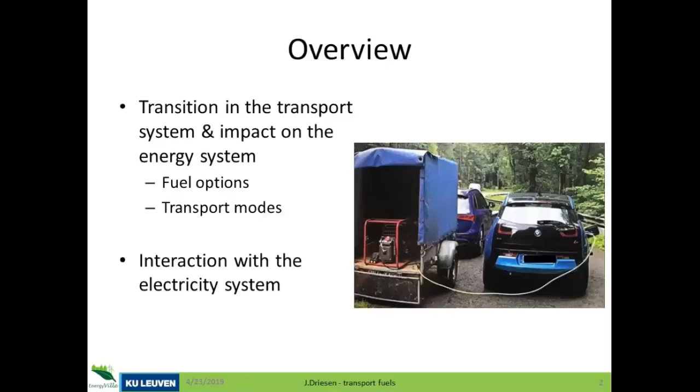Now, as you all know, there's an energy transition happening in a lot of countries around the globe. And you always see these typical pictures of the new energy system, mainly an electrically driven energy system with solar modules, wind turbines, offshore wind turbines even, some classical power plants used in a different way. But also, always you see more and more vehicles appearing on pictures like this. So clearly it's understood that there must be an interaction between these new types of cars and the energy system.

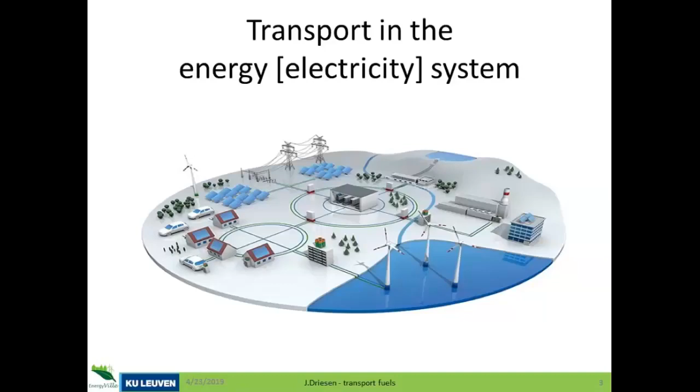What kind of interaction will we have? Will we go to electric cars, hydrogen cars, or will we make synthetic fuels? Well, it will probably be a mix of all those in different types of transportation, which I will try to explain to you in this hour.

Let's start with the first type of clean fuel ever considered, because we want to get away from fossil fuels due to CO2 emissions linked to carbon content, and maybe replace them with biofuels, which are chemically identical but based on plants, so a short carbon cycle. That idea kept flying for a long time, but there are problems, because we need to grow a lot of plants to convert into biofuel products, and it's clear this may interact with the food supply system and the food chain, causing land competition.

Of course, we can grow newer types of biofuels that interact less with the food chain, but there will still be competition for land. Also, in recent years it became clear that growing big amounts of plants for biofuels causes interactions with CO2 produced by fertilizers. So in the end, it's officially renewable, but biofuel is going more into the background and isn't really a widely interesting option anymore.

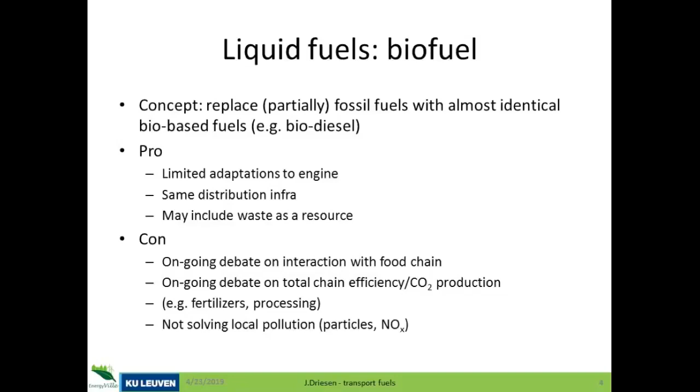And by the way, if you switch to biodiesel, you don't solve the health-related problems like particles and NOx emissions. So the next candidate was natural gas.

Of course, this is a fossil fuel. We start from methane, change the engines a little bit, and get very clean burning with almost no particles and almost no NOx if tuned well. In a lot of countries this is very popular for heavy traffic like public buses - you see these a lot in Europe and some American cities.

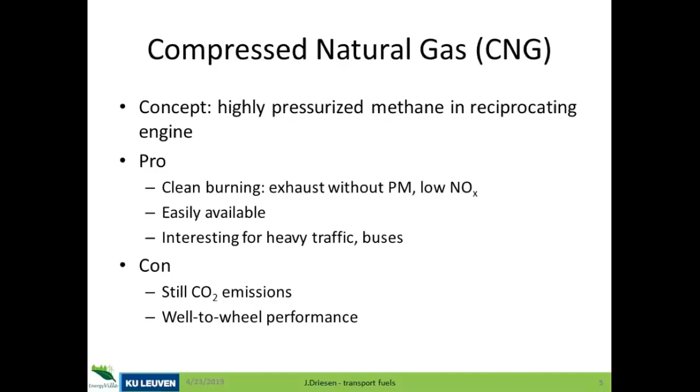But you may wonder, is this the best way to use natural gas? Surprisingly, these days, when we can also consider electrical vehicles as a realistic option, you may consider using that natural gas to make electricity instead. Then it becomes interesting to check the whole chain, well-to-wheel as we call it, in case of transportation, and we can compare, for instance, the top line that you see.

There we use natural gas, compress it to the right pressure level, put it into the car, and drive with relatively low efficiencies. But these are normal efficiencies for combustion engines, for reciprocating engines. So in the end, you have a well-to-wheel efficiency between 10-20%.

Now, these days, we can also convert natural gas to electricity using combined cycle power plants. There's of course a little bit of transmission and distribution losses along the way, and we can put that electricity into an electric vehicle with highly efficient charging - this is power electronics, efficiencies always in the 90s. And when you drive, this is also extremely efficient because there's no thermodynamics involved - this is pure electromagnetics, so efficiencies of drive systems can be very high.

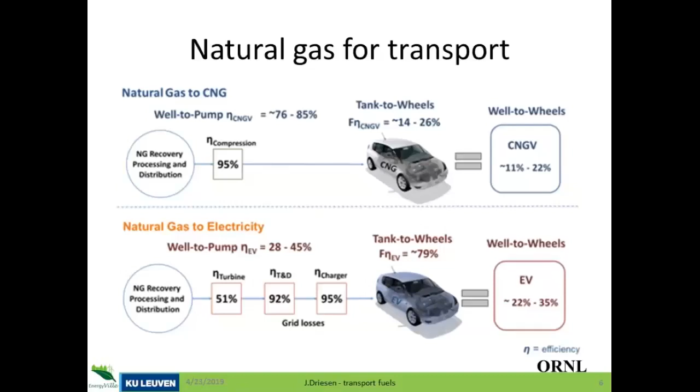So in the end, if you used your natural gas to power an electric vehicle, you'd have double the well-to-wheel efficiency compared to natural gas vehicles. So you see, even if you still consider using some fossil fuels as a transition, moving as quickly as possible to electric vehicles is a very interesting option anyway.

But where's the hydrogen? Because for a long time, talking about clean cars meant talking about hydrogen vehicles. Now, a hydrogen vehicle, honestly, is an electrical vehicle - you just make electricity on board using a fuel cell based upon hydrogen that you put in a tank in the vehicle. So in fact, this is what we call an electric series hybrid car. And the exhaust is of course clean, because if you burn hydrogen, you get water as an exhaust.

Now, the hydrogen itself is not easy to make, although in some chemical processes it may be a cheap byproduct - but watch out, these chemical processes may also produce a lot of CO2 emissions directly or indirectly. So you have to come up with clean hydrogen based upon renewables - you need clean electricity to make green hydrogen to put in cars. That means you need electricity somewhere along the way to make hydrogen as an intermediate fuel to drive your car in the end, which is also an electric car.

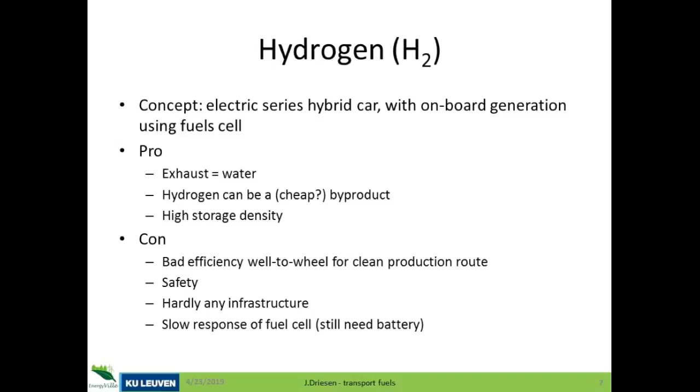You may also want to consider well-to-wheel efficiency. If you use electricity anyhow, we can put it directly into lithium batteries in a car and start driving with very high efficiency. Alternatively, we can use that electricity to drive an electrolysis process, with compression along the distribution chain causing more losses, and in the end convert it back into electricity in a fuel cell. Fuel cells have a big range of efficiencies, but you will never reach the high efficiencies of direct electricity conversion. Several well-to-wheel studies show that with the same electricity, you can drive 3 to 4 times further with a battery car than with a hydrogen car.

Of course, we should not throw hydrogen off the table immediately, because its big advantage is that it can be put in a tank under high pressure, so you can take a lot of hydrogen or another gaseous fuel along with you. So if hydrogen still has a future, it's probably in long-range transportation where you have to cover large distances, or as a kind of storage for energy that you want to put aside for a very long time.

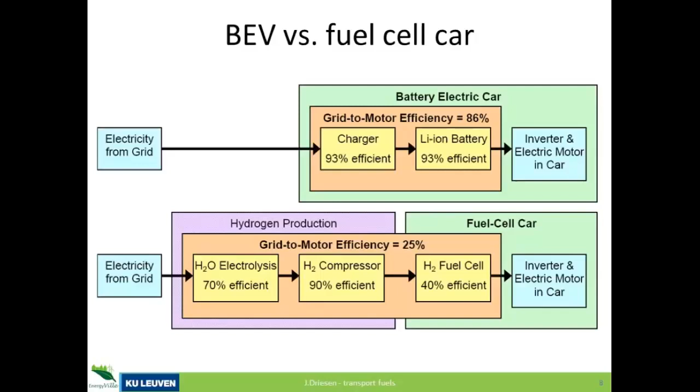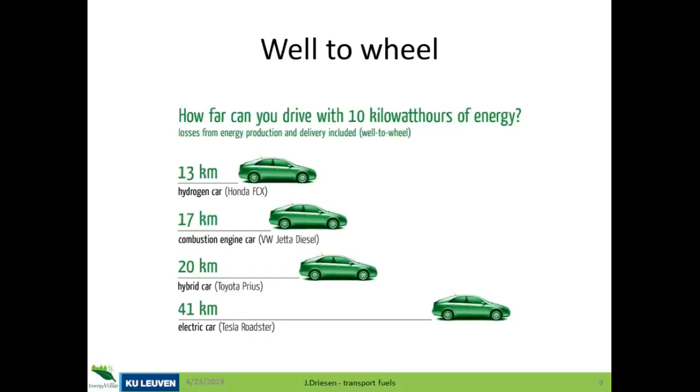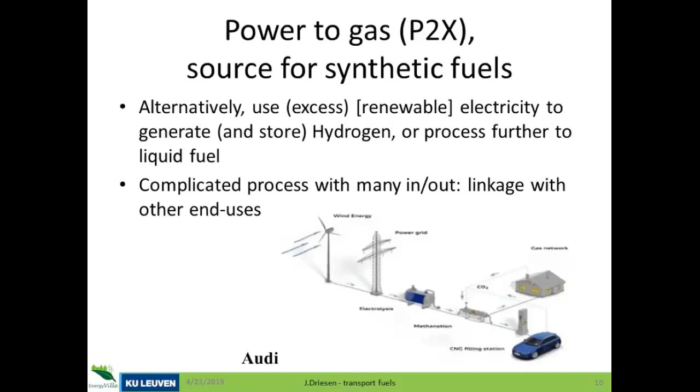But how are we going to use hydrogen if we still use it for long-range transportation? Then we have to consider power-to-gas processes, making synthetic fuels. With synthetic fuels, we try to use excess renewable electricity to generate and store hydrogen, or process it further into other gaseous or liquid fuels. But for that, you need a lot of chemistry, illustrated in the next picture.

If we start from electricity, we use electrolysis to generate hydrogen. You can combine this with CO2, which you can capture from the air if you want - this is like a negative emission. You can combine that in a methanation process, and you're left with clean natural gas. You can store that, or put it into a natural gas system as a kind of clean synthetic fuel.

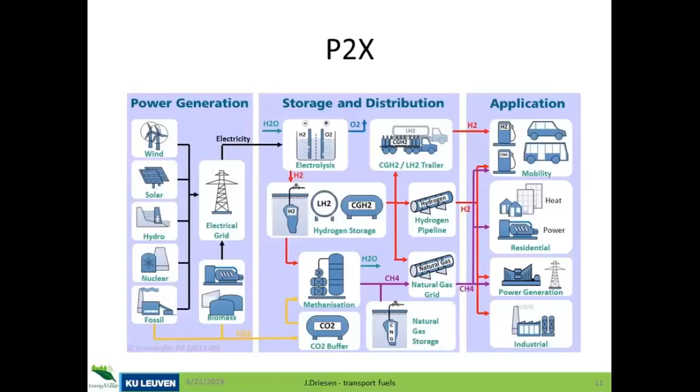For a long time, some car companies thought this would be the ultimate clean vehicle solution, because they didn't believe in what was possible with batteries. Companies like Audi invested heavily in power-to-gas research, but in the end it seems more interesting to use this technique for long-term energy storage, or to use these synthetic gaseous fuels for long-range transportation - maybe ships or big trucks. This is another option we will definitely need to consider; we should not throw away the natural gas system right away, as it will probably be used for a long time with this technology to come.

Do we always need the electrical route? There are alternatives - you can also make a synthetic fuel directly from sunlight, but this is low TRL technology, possible in the research lab. You need alternative types of solar cells, not the ones producing electricity, but ones with built-in catalysts. They will, for instance, take water from the air, a little moisture, and turn this into hydrogen while releasing oxygen. This has been proven mainly on lab scale, and the efficiencies are still really low, but never say never.

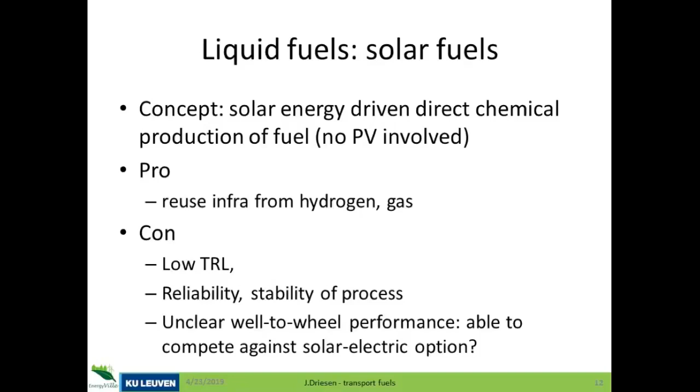Maybe one day we will combine renewables making electricity with renewables making fuels. But for the moment, and definitely for the coming years, maybe decades, the solar-electric option to make these kinds of fuels will definitely be the most profitable. So, these are solar fuels. To quickly conclude: electricity-based transportation is probably the best - it has good performance, enormous traction, very good well-to-wheel performance, and low noise, although some people consider that too a problem, that it is too silent.

We know how to produce these vehicles cheaply. I have to mention a study published last week. For a long time we said it would take years before electric cars would be as cheap as combustion vehicles. Well, last week Bloomberg brought out a study showing we might reach the break-even point by 2023 already, mainly because of mass production and crashing battery cell prices, which were always the most expensive components. This is a very important date, 2023, because it means we are one leasing cycle away from having cheaper electric cars compared to combustion cars, if these studies are right.

Of course, there are some points to discuss. I'll talk about the charging problem in a moment. For a long time the cars were a bit heavier, although with lithium batteries we've shrunk them by a decent factor. Some predict we can shrink them further by a factor of 4, so we can put much more energy into the car, and range anxiety problems will disappear. The only problem that remains is whether we'll have enough charging points in the right place, but I'll discuss that in a moment.

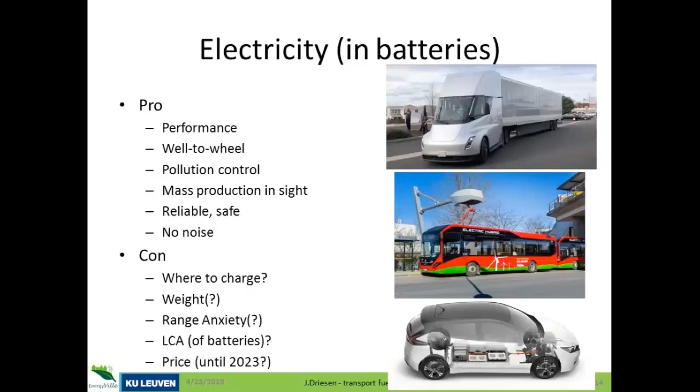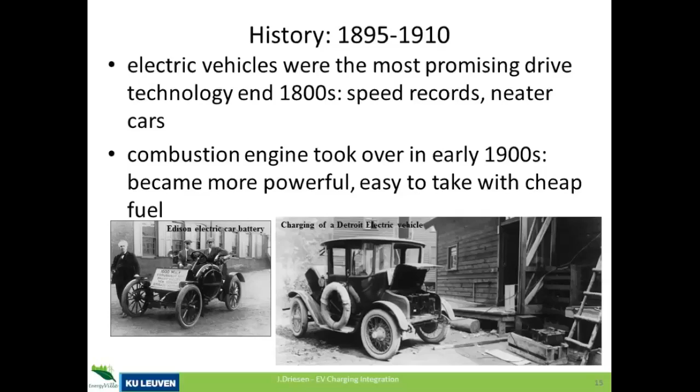So actually it looks pretty good for electric vehicles. But on the side, something some of you may not be aware of: electric vehicles are older than combustion vehicles. At the end of the 19th century, these were the promising vehicles—very easy to drive, easy to start, clean. They were considered cleaner than the common form of transportation then, which was horses, and I leave it up to your imagination what they mean by cleaner exhaust. But even then, they had to think about charging and where to put charging stations in the then-developing electrical grid. So after a century, we are still fighting the same problems.

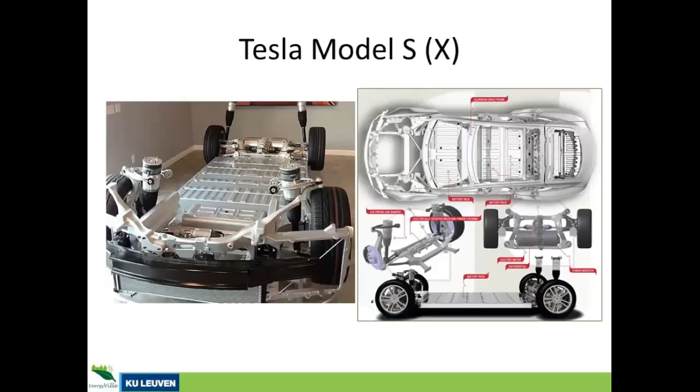Honestly, I also have some mechanical engineers following my courses, and they don't like this. But this shows there's potential to make electrical cars cheaper in the end if we can bring down battery prices, and that seems to be happening in practice.

A cheaper type of electrical car, which is very popular, is for instance the Nissan Leaf, and there we see a similar design with batteries in a kind of skateboard structure under the floor. But why do I show this Nissan Leaf? Well, the Nissan Leaf was the first car that had a fast charging plug.

If you look at the picture on the bottom right, you see there's a bigger plug there. That's a DC plug, a CHAdeMO plug, which allows charging at more than 50 kilowatts—a relatively high rate, which would allow you to recharge your car in probably less than an hour. Of course, we still have to compare this to being at a fueling station for just a few minutes, so we're not there yet, but this is just a start.

The new standards now being rolled out with new charging stations being deployed go up to several hundreds of kilowatts. And honestly, you have to ask yourself, do you really need these fast charging stations all the time? Because in the end, a car is just a fancy object that you buy to be parked most of the time, so honestly there's lots of time to recharge slowly as well.

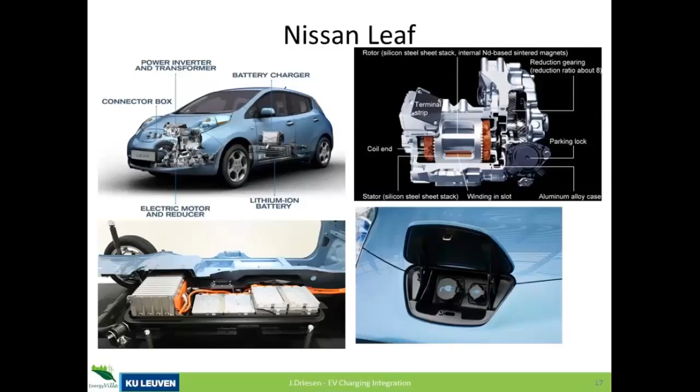But I'll come back to that in a moment. Now, if you look at the current market in Europe and the US, there's also a lot of plug-in hybrid electrical vehicles on the market.

These are considered now as a transition technology towards full electric driving. These are vehicles that can drive a bit further if the battery is depleted, so they can use standard fuel then. But this leads to quite heavy vehicles, which are not that cheap. So it's expected that probably a decade from now, most of them will disappear again from the market. But in the meantime, it helps us get used to plugging in the charging cable.

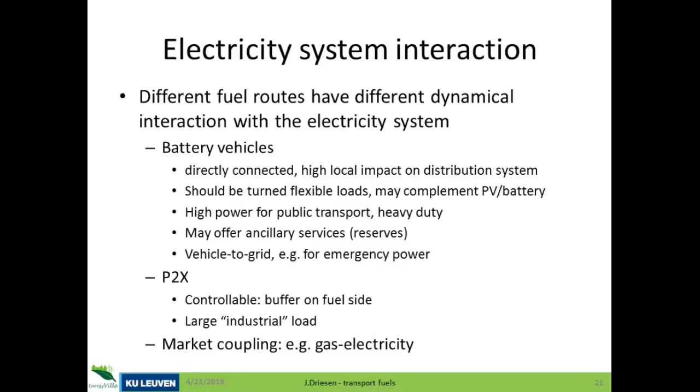But a big question is still, where are we going to charge? A lot of people have a driveway or a garage, and that could be the home base where you install a relatively low power charger, and overnight your vehicle can charge. But of course, at night there is no sunshine in case you have photovoltaic panels. So we have a perfect mismatch there.

But a lot of vehicles, especially company vehicles and professional vehicles, will be charged in the parkings of offices throughout the day. And then there's still the question: what if you go to pay a visit to a city or another place, or go to big shopping malls or points of interest? You also have to think of offering charging there. And there could be some interesting business cases behind it.

For instance, some big shopping chains, think of IKEA, in some countries offer free electricity if you come shopping with them. So you see here, we have to think of the business models too.

How will this affect the local electricity system? This is not a minor change. You can easily prove that if you add an electric vehicle to a family home, the electricity consumption on an annual basis more or less doubles in most countries. So there is a very big impact, but on a very local scale.

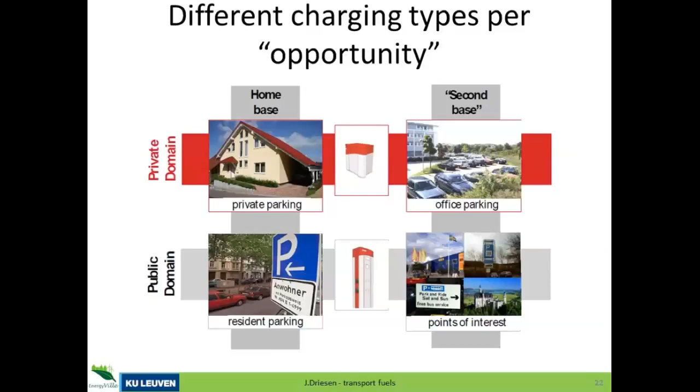And the risk is that if you do uncoordinated charging - we drivers are all social animals, we all go to work at the same time, come home at the same time, and we plug in at the same time - you end up with big peaks in the evening, coinciding with other consumption peaks from HVAC, cooking, lighting, etc.

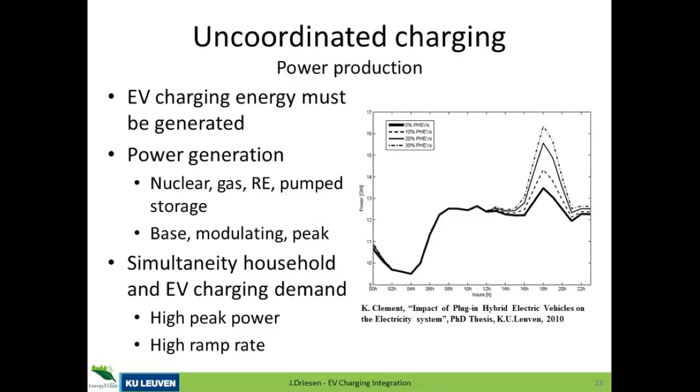So we end up with a very big consumption peak in the evening that may stress the local distribution feeder a lot. We've made some studies for Belgium and other European countries, and we came to the conclusion that roughly if 1 in 3 vehicles would be electric, that's the limit you can handle. If more than 1 in 3 vehicles turn electric with uncoordinated charging, you tend to overload the transformers and mess up the voltage profiles too much. That's on the distribution level.

Now, what about the power plants? Sometimes you read articles saying, yeah, if we all drive electric, we need to build nuclear, or we need to build coal, and then we're saving no CO2 emissions. Honestly, if you study this carefully with good simulations and models, in most countries you will hardly see the difference.

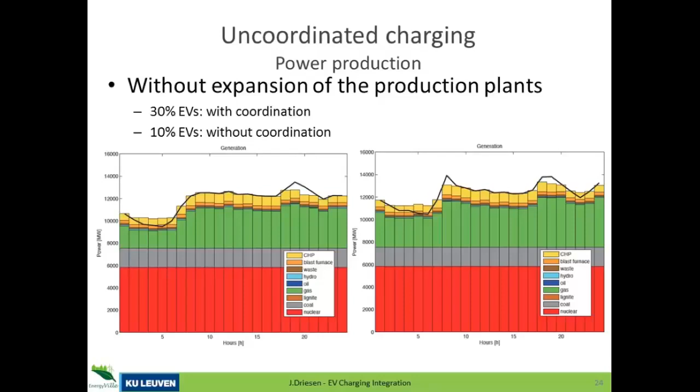There is, of course, more electricity consumption, that's without doubt, but it can be spread out and matched, if everything is implemented correctly, with new types of production like renewables in a relatively easy way.

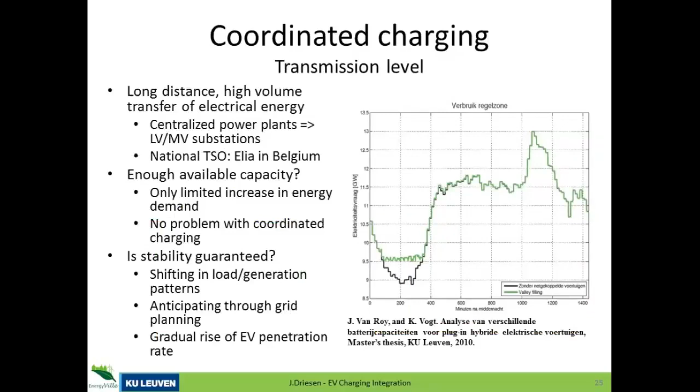Now, what about transmission level? At transmission level, they hardly see the presence of electric vehicles because they're spread out over the whole country. Especially if you use coordinated charging and mainly charge at night, it may help fill in the low demand typically seen later at night. This is an effect transmission system operators will like, but you need coordination and even new types of business models to make this happen.

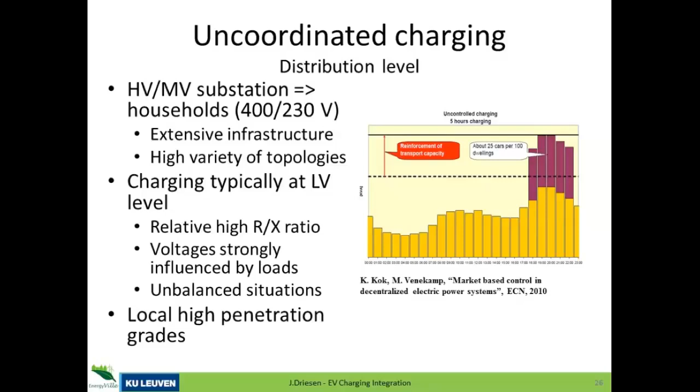But again, the biggest problem is actually at distribution level, where we risk big peaks, especially in the beginning of the evening, high loading throughout the night, and in some cases increasing unbalance on the voltage system. This is very similar to problems seen if you massively roll out heat pumps to heat or cool houses, though there the load is spread out over a longer period during the day.

So we need coordinated charging. And then the next problem pops up: what about the interaction with photovoltaics on buildings? There we have a big problem, because typically during the day when there's lots of sunshine and electricity can be produced, the vehicles are not at home, they're not charging, or at least not charging where you produce your solar electricity if you do this at home.

So we have there the perfect mismatch, but storage technology may help. You see in a lot of countries a clear trend towards selling photovoltaic systems together with battery storage, so that you can implement the right kind of flexibility and shift your consumption and production of electricity a few hours apart, with some local storage complementing the photovoltaic production.

And if we are using the vehicles as a flexible load, because again they're parked for a lot of time, either at work, in parking lots, or at home, the next step is to consider these vehicles also as a kind of flexible battery. And that is a very interesting thought. They call this the vehicle-to-grid model.

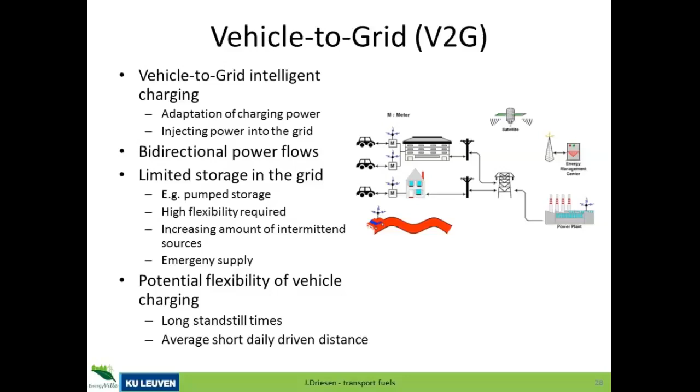Now, of course, if you want to implement this, it also needs smart regulation and very good planning and IT to find out where the vehicles are and whether you can use them, and then also come up with a nice business model to compensate for these delivered services.

Now, this is one example of how cars are probably going to change the electrical system. But you can think further. Is transportation itself not going through a major change in the future? Because we are still used to thinking that either we have our own personal vehicles or we take public transportation, like electric buses or even trams and subways.

But if you look at private vehicle ownership, in a lot of countries this is clearly on its way down. Car ownership is not the first choice of many young people anymore. They use shared vehicles, or they only rent vehicles according to their need at that moment. This trend is part of the trend towards mobility as a service.

So that means for the vehicles themselves, these shared cars are actually used much more than privately owned vehicles. They completely wear out in 2-3 years because they are driving so much. But this has a big consequence also for charging, because there's less time for them to recharge. So probably this will indirectly also cause a higher need for faster charging modes as well.

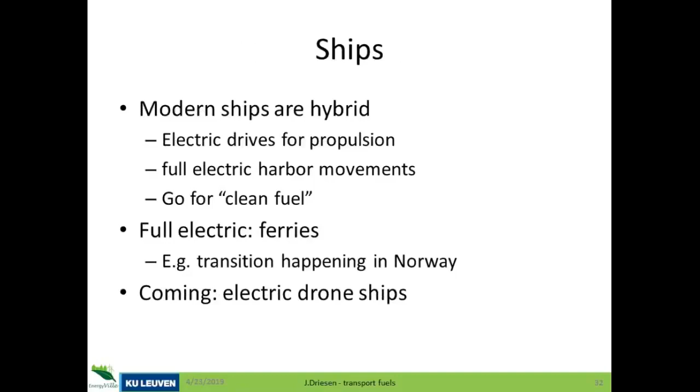So these days, with some ships, it's easier to park them than with your own car. They can just move sideways if necessary with these pod drives and bow thrusters. So it is possible to run them electrically.

It's just that if you have to cover a very big distance, you cannot take enough batteries on board to cover this. This will probably always be a problem, which is why we need typical fuels, maybe hydrogen or a further developed fuel. For instance, for the moment it is considered to use either a gaseous fuel like LNG or even ammonia, because ammonia doesn't contain any carbon at all, as a transportation fuel for long-range shipping.

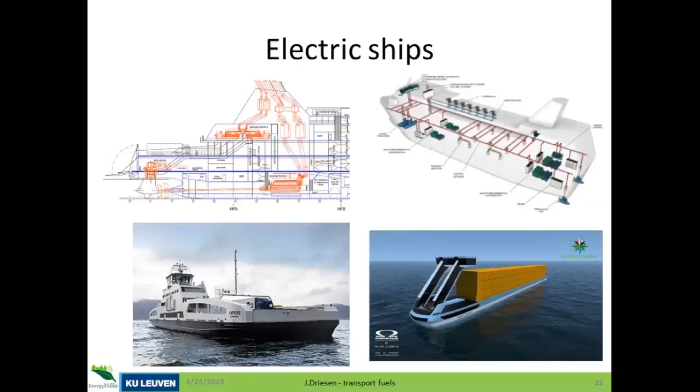So for ships, we can handle it. But what about flying? In some doom scenarios about the climate, people think that we will have to stop going on holiday by airplane because there's no alternative to that.

Well, wait a moment. Actually, a lot of airplanes these days are also hybrids. They use a lot of electrical technology, mainly because of the weight reduction you can get out of this. Historically, the airline industry didn't like this because they only believed in mechanical technologies, since they are reliable. They didn't trust electrical technologies, but they had to change their mind for new types of airplanes like the Dreamliner, the Airbus 350 or 380, just to save weight.

They also use onboard batteries to balance out local consumption, and in that way they can make the engines more efficient because they won't be using bleed air anymore. Other experiments are already being done with electric taxiing to save fuel on the ground.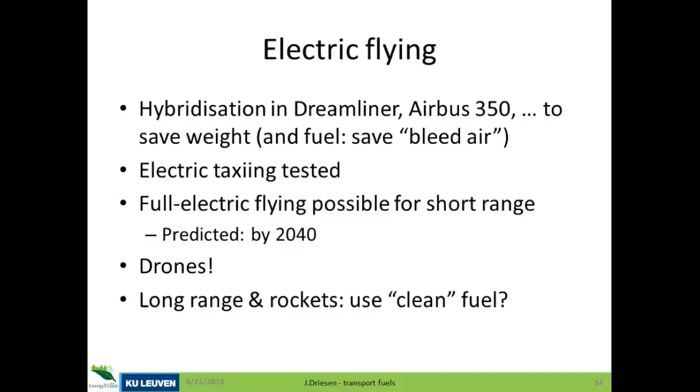And here we saw the same trend as with the postal vehicle I told you about before. Companies like Siemens insisted on building such airplanes because they believed in it, while traditional companies like Boeing and Airbus did not. But in the end, Airbus is definitely changing its mind, and they are now also developing electrical prototypes.